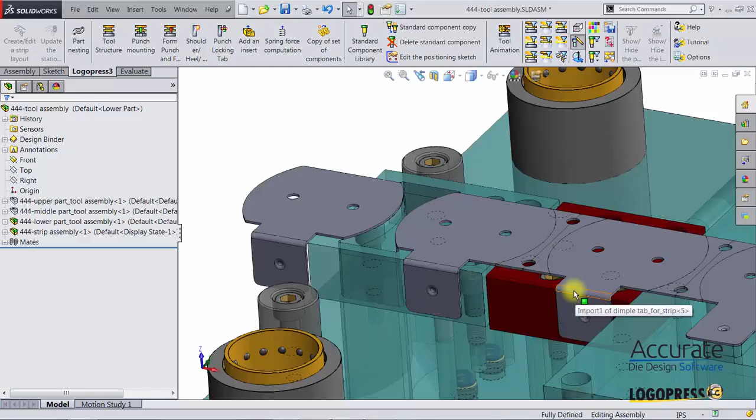We'll now make another change to the piece part. I'm going to add some flats to each side of the part. And this will also cause us to reduce the progression of the strip, otherwise we'd have too much scrap in between the stations. So first thing I'm going to do is open up the strip assembly.

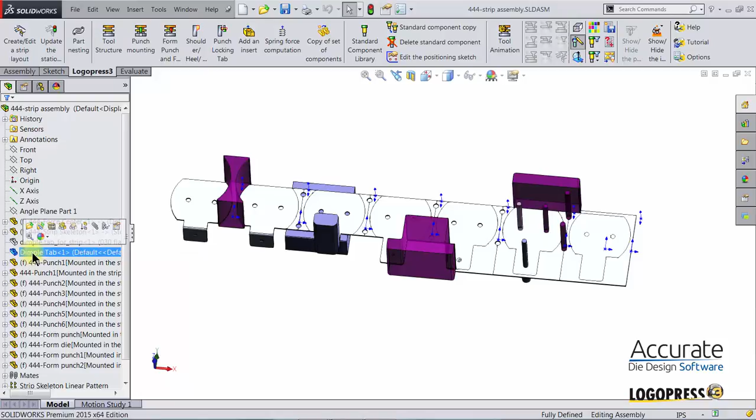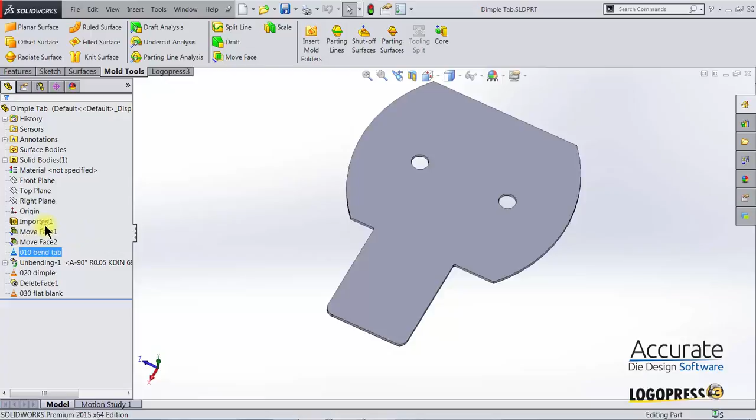And then, since this is a change to the part itself, we need to do that in the reference part. So I'll open up the part called Dimple tab. And the reference part is the one that has the station marks in it. So I'm going to roll up in the feature manager tree above that 010 station mark. And I'm just going to create those flats, I'm going to create a sketch on this top face and draw a rectangle.

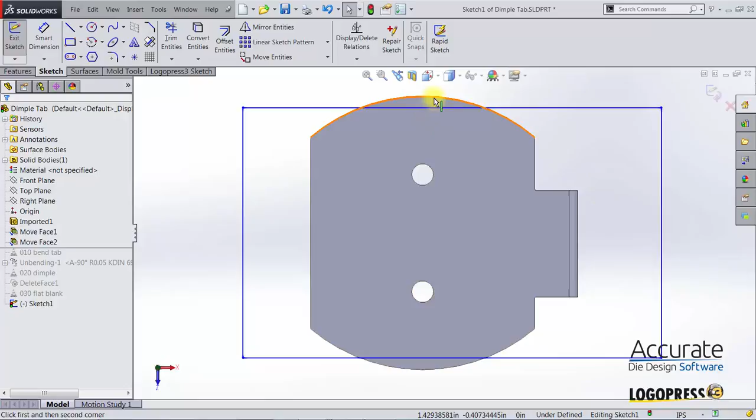I'm going to convert these two edges using the Logopress3 Convert for Construction. And then place two dimensions. I'm going to dimension from here to this edge. And I can make this dimension under Leaders. I want to make it a minimum dimension. So I have a dimension up here, and I want that to be 0.0625, 1/16 of an inch. I'm going to place the same dimension down here.

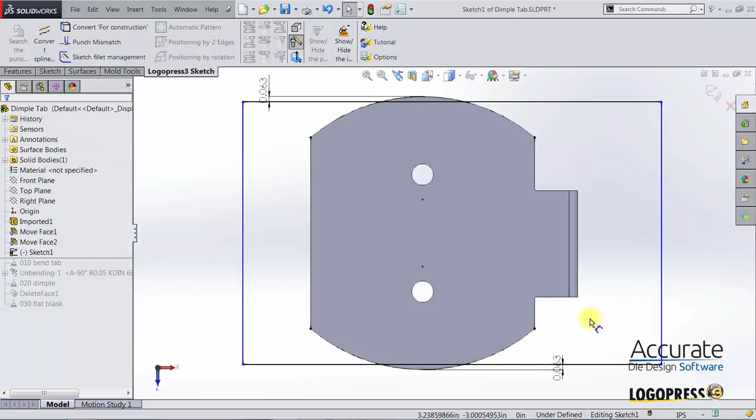Here's a little trick. If I hold down the Shift key before I make that selection, it automatically makes it a minimum dimension. And then I'll just place the dimension on the overall width here and make it 8 inches. And I'll also place the dimension here from the center of here to one of these edges, 4 inches, half of that. Just so we know we'll have it extending out past the part in each direction.

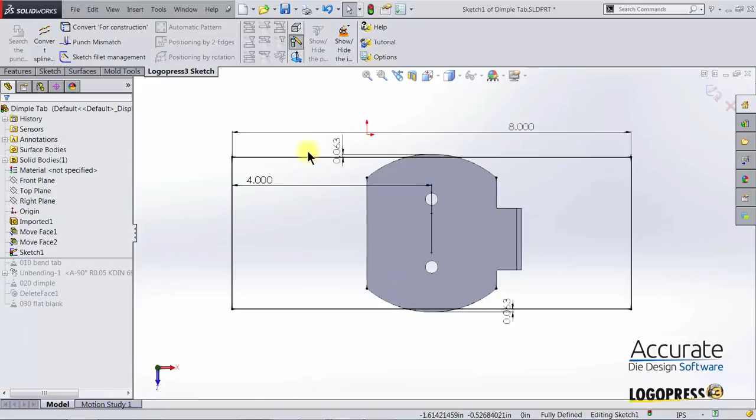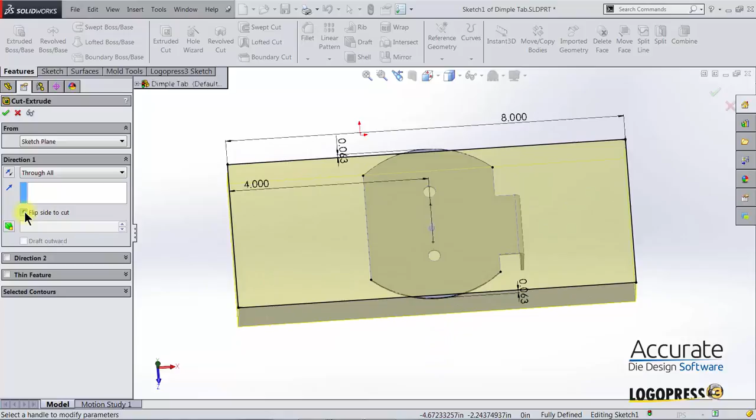Then I'll go over here to features and use a cut extrude, SOLIDWORKS cut extrude feature, to cut through all. And I want to flip the side that's going to get cut, using this option, flip side to cut. Now you can see there's a little arrow right here going to the outside. So instead of cutting the inside, it's going to cut the outside. And now we have two flats on the part. We're going to roll down to the end of the feature tree. You see our blank is also updated. And save.

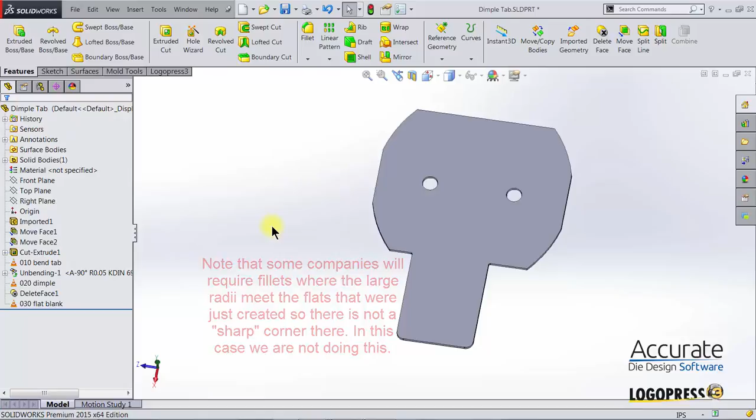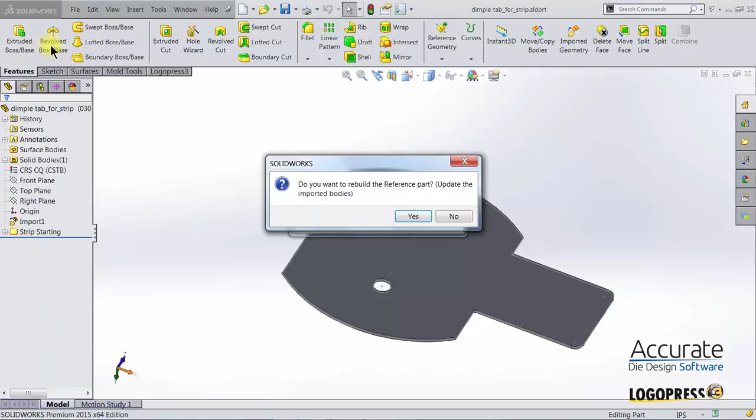I'll tab back over to the strip assembly. And you can see it has not updated yet into the part because, just like the last change that we had made, we have to select update the stations of the annex part using the strip. This will update the body files that the annex part is referencing. Do I want to rebuild the reference part? Yes. And now you can see the part has updated.

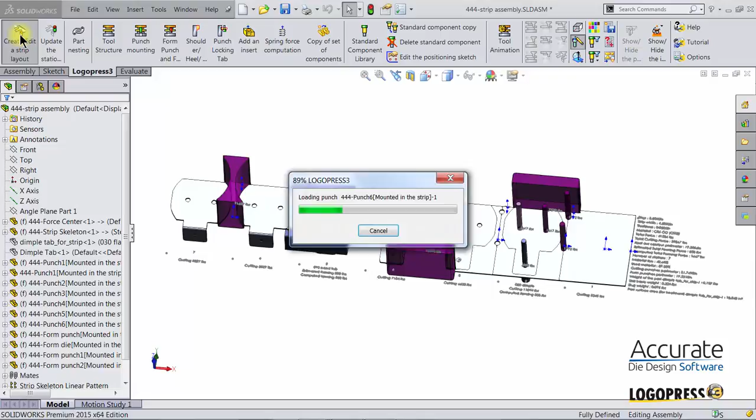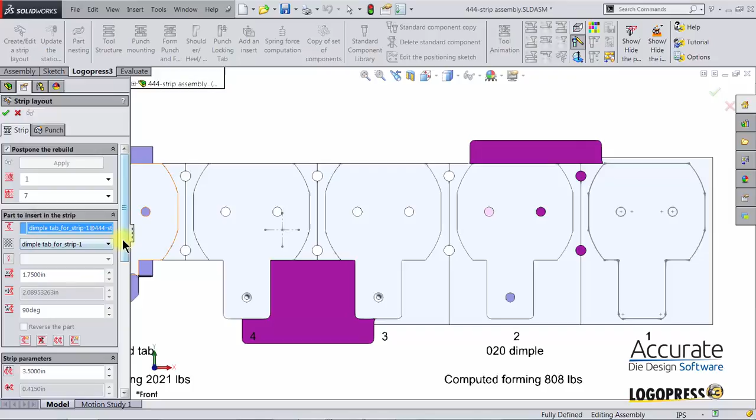So now I'm going to go into Create Edit Strip Layout. I need to update the sketch for this punch, this end cutoff punch. And also, I want to change my progression because there's too much scrap now in between the stations. So I'll do that first. I'm going to come down here. Actually, I'll change the sketch for the end cutoff first. I'll click on it, select Edit the sketch of the selected punch.

And I want to convert some additional geometry into the sketch of this punch. This is new geometry. That's why it did not update automatically. So we have to convert this in manually because since it's new, Logopress and SolidWorks don't know what to do with it. So I'm going to select Convert Entities, SolidWorks Sketch, Convert Entities, select, this is the blank sketch I'm selecting, those two vertical lines, and convert them off from the blank sketch into the sketch for this punch.

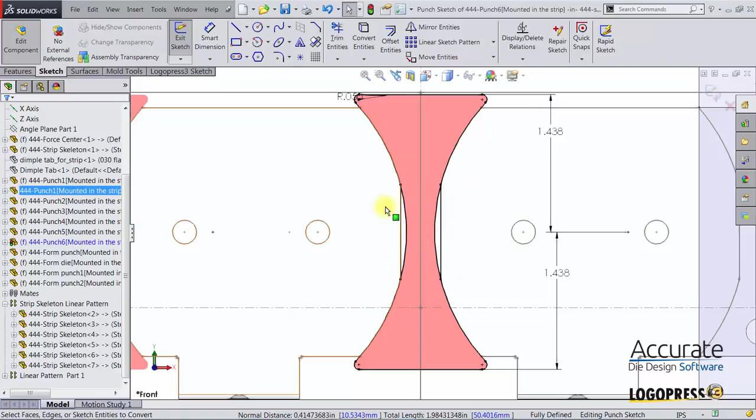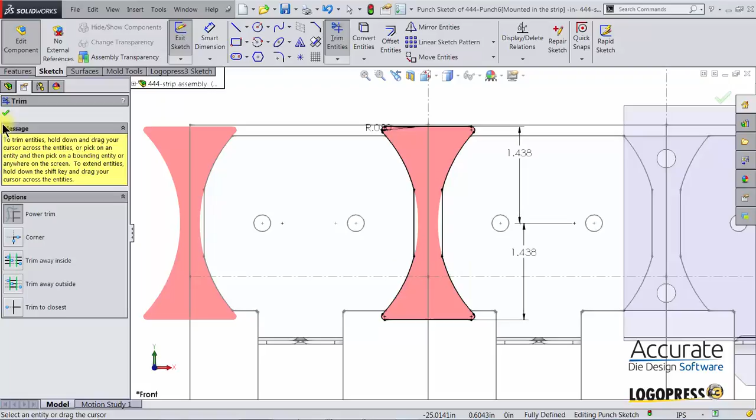Then I'll use the SolidWorks trim command to trim this area away. And this is the power trim function I'm using, where I can just cross over the area I want to trim. And now this punch is updated to the new geometry. And apply that change. And I'll save.

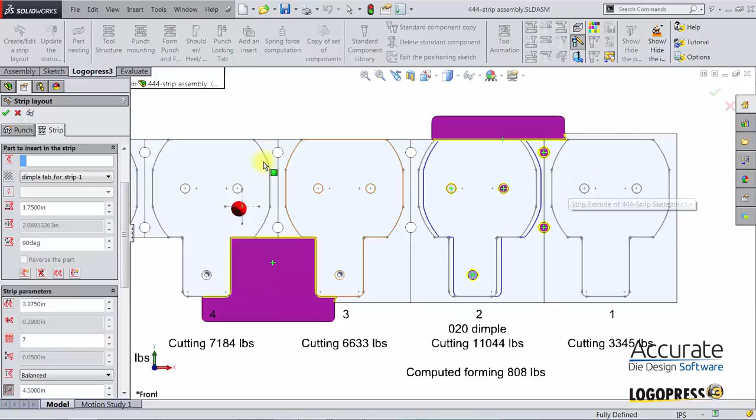I can now change the progression of the strip. So go to the tab called Strip, and down here I'll change the progression by 1/8 inch because I reduced the width of the part by 1/16 on each side, so that's an 1/8 inch. I'll update that right away by hitting apply.

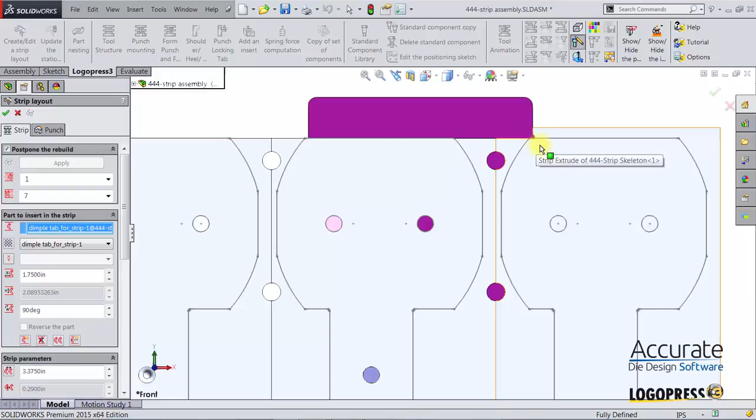And I'm also going to move the part, I'm going to recenter the part this way, because you see this cutoff punch, the length of it did update with that progression change, but the position is now going into the part itself. We want that to remain in the scrap area with this mismatch. So I'm going to change the part position by an 1/8 inch, reduce that. So it's just sliding it over the X part position an 1/8 inch.

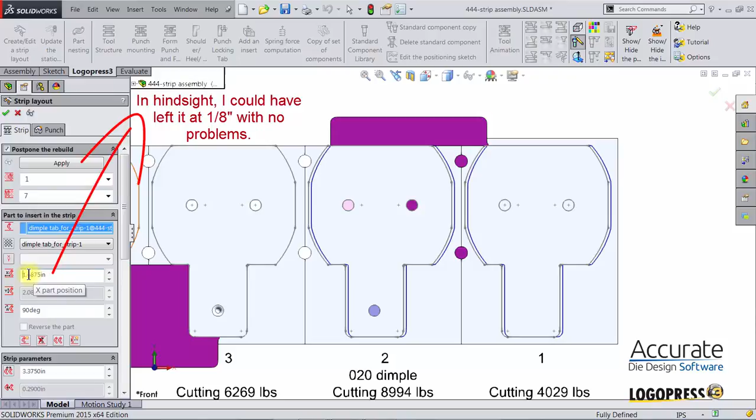Actually, I'm going to reduce that by only a 1/16, so I'll just minus 0.0625, and you can see now it is 1.6875, and I'll hit apply. And I did it that way because now the pilot holes are still centered in between the two stations.

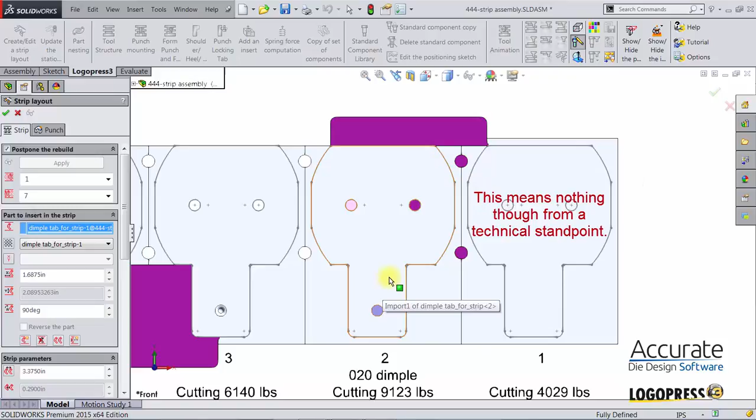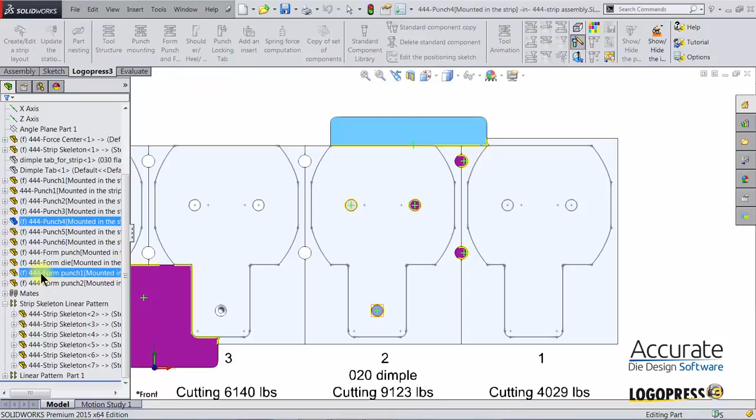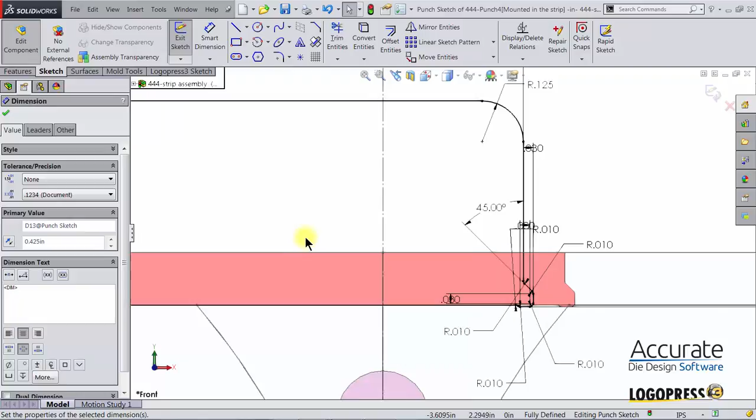This punch now, it is too close to the part itself. I want this edge to be still in the scrap. So I'm going to click on it, select edit the sketch of the selected punch, and I'm just going to reduce these two values by an 1/8 inch. And you can see it is now in the correct position.

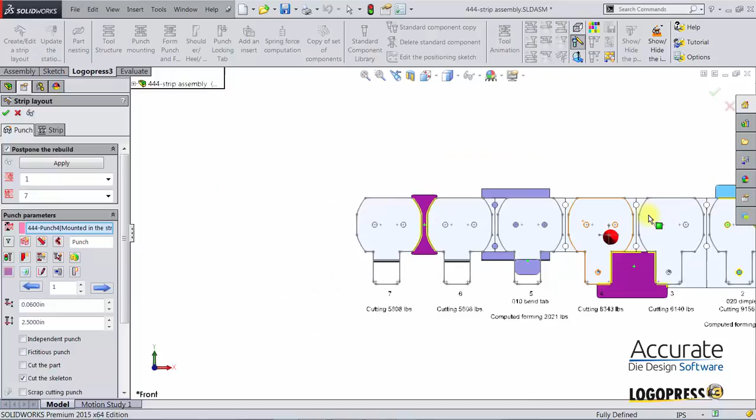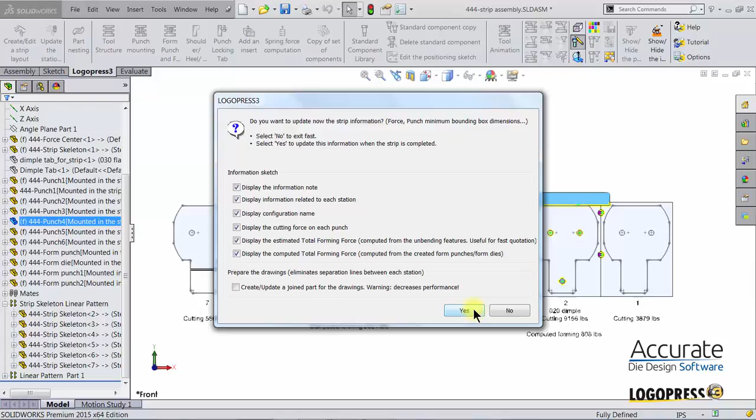Everything updated nicely, even our cutoff punch. You can see, but I have to apply the change of this cut. And I'll click OK, and I will update the information note. And save that change. I will now tab back over to the tool assembly.

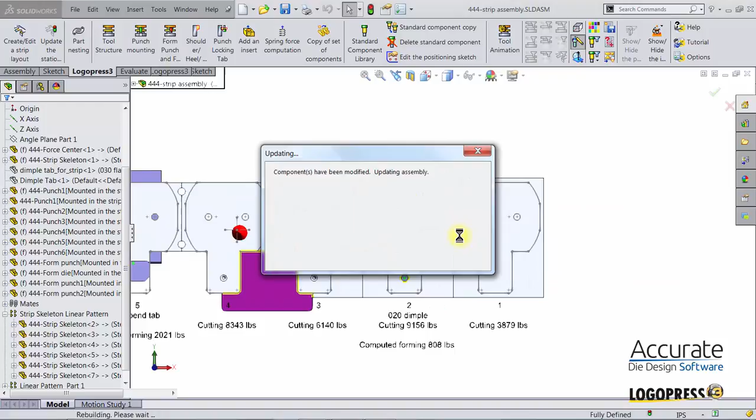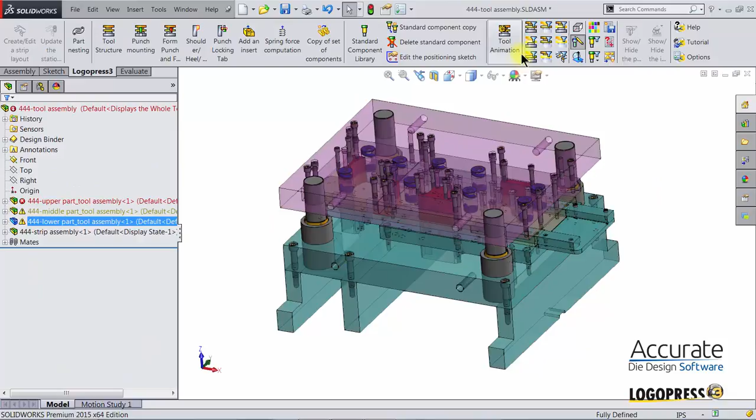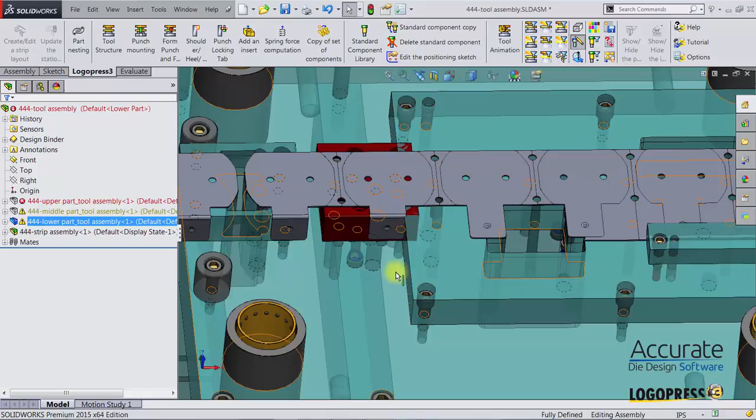There are some errors here, but we did change the progression. So let's see what happened there. First, you can see that the form punch, which is defined off of this part, did not move. But now that the progression has been reduced by 1/8 inch, the end of this die block is going too far. And if I measure this, you can see the normal distance is 1/2 inch. So I'm going to reduce the length of this by that 1/2 inch plus an 1/8 inch gap.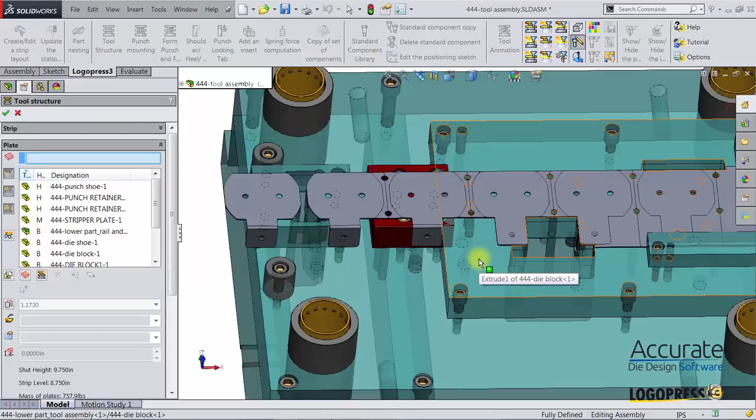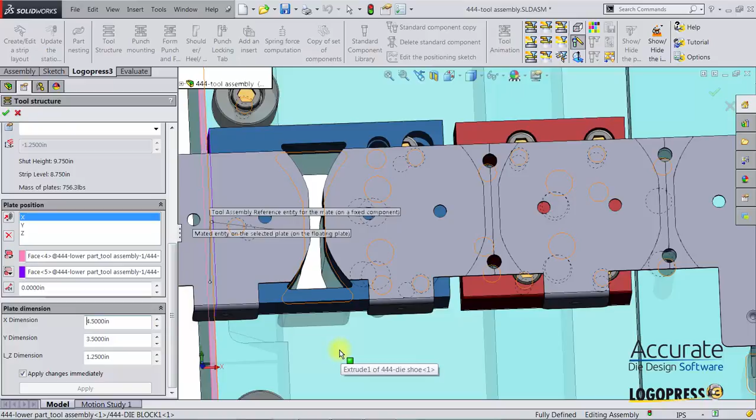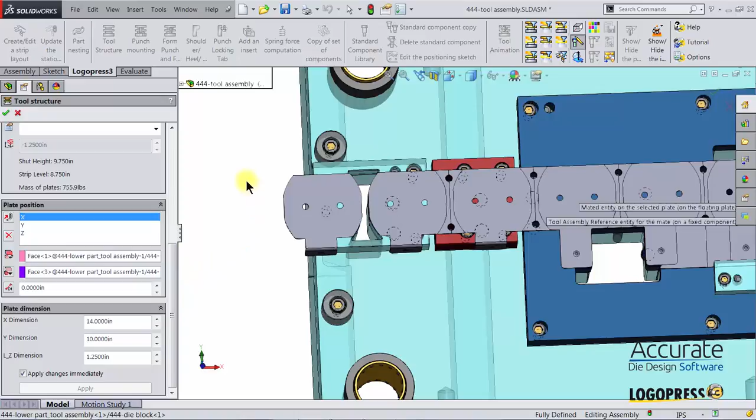And I'm also going to reselect this die block, and I notice that this is 14 1/8. Let's make that an even 14 inches. There we go. And exit tool structure. If you ever do see this where the screws do not look like they're in line with the holes, that is most likely a rebuild issue. If I just put focus in the graphics area and do a Control Q rebuild, you can see that the positions are now correct.

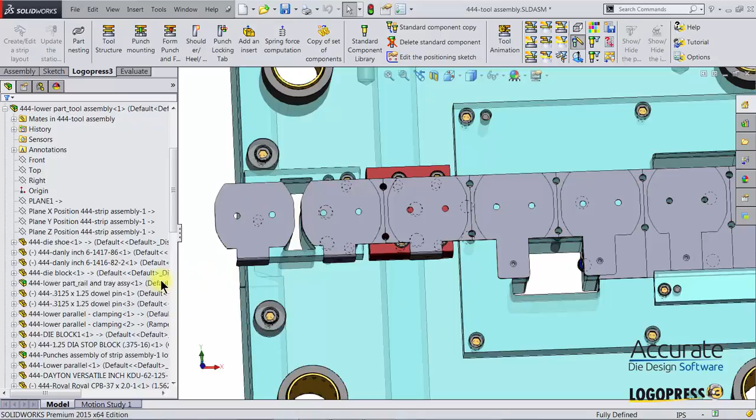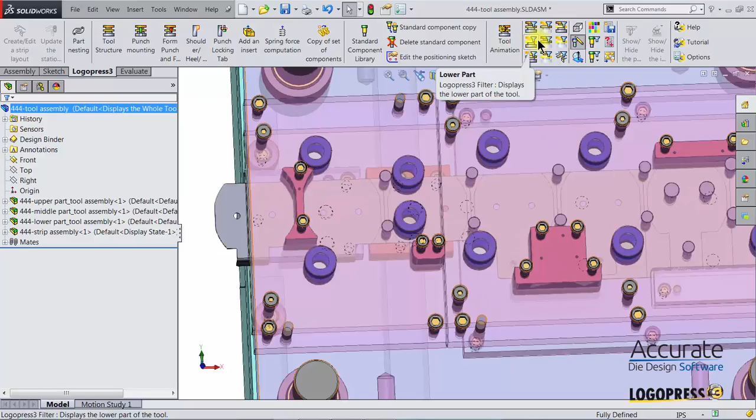And you can see, show the rest of this, you can see that the errors have been just corrected. Those errors were caused by items being forced off of the blocks that they once were on because of that progression change. So we just had to make a few minor adjustments to the length of blocks, make one shorter, make this one shorter, make this one a little bit longer, and I do see a couple of other things. You can see the position of the lifter pins need to be updated.

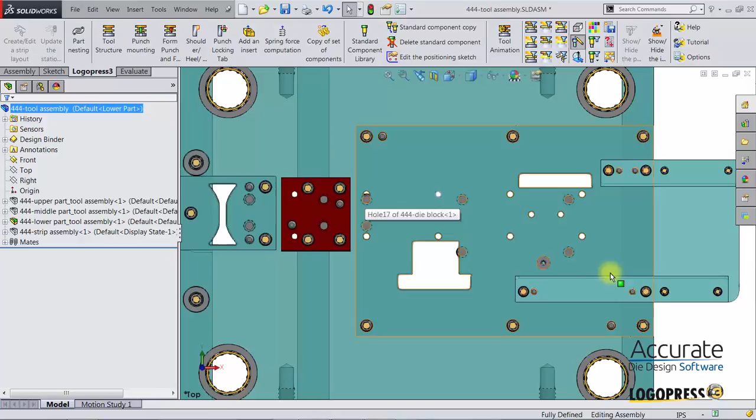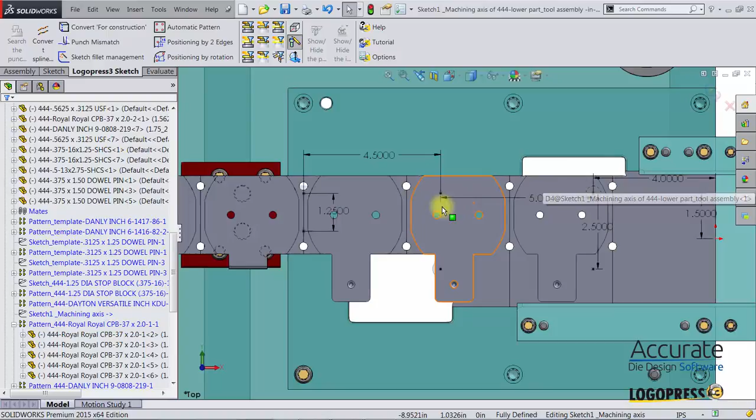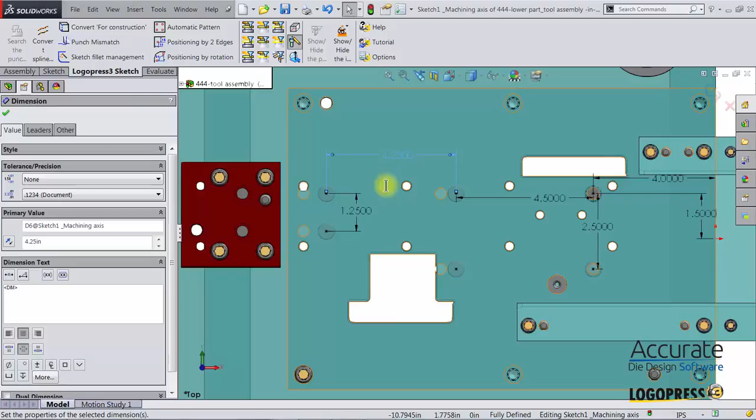So I'm just going to click on one of them and select Edit Positioning Sketch. And I'm going to show the strip layout. And I'm going to reduce these dimensions. I'll reduce this one by, see what a 1/2 inch looks like. That looks good. And this one right here, I'll reduce that one by a little bit more also. Say a 1/4 inch. Show the strip again just to make sure it's going to look good.

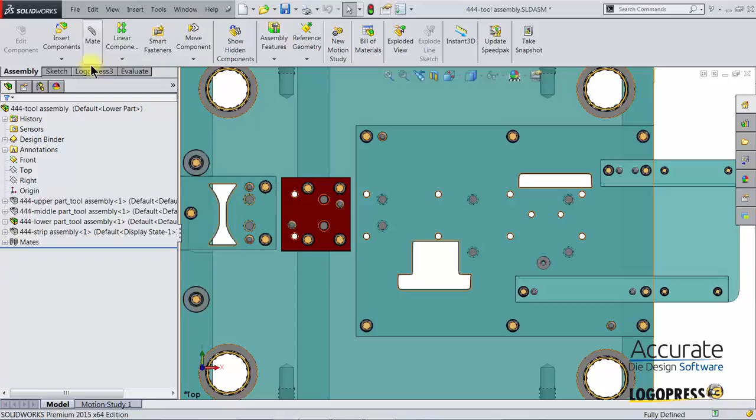Exit the sketch, and the position's updated. I'll double check that, show the strip again and make sure that the stripper plate, yep, that all updated there, along with the position of the pilot holes. And I'll also look at the upper, yep, all my pilots positions have updated, and the position of my punches, everything looks good.

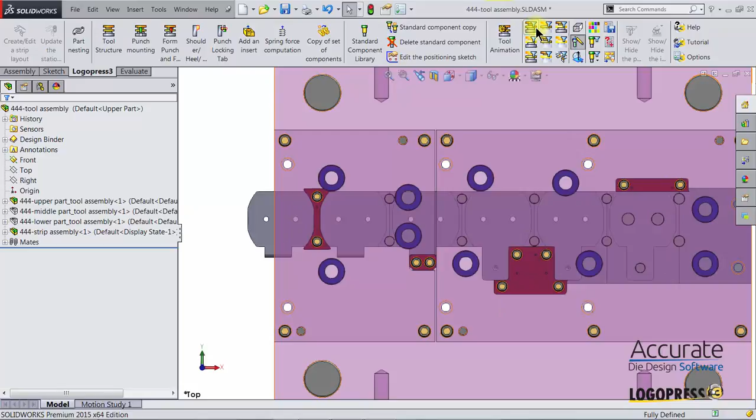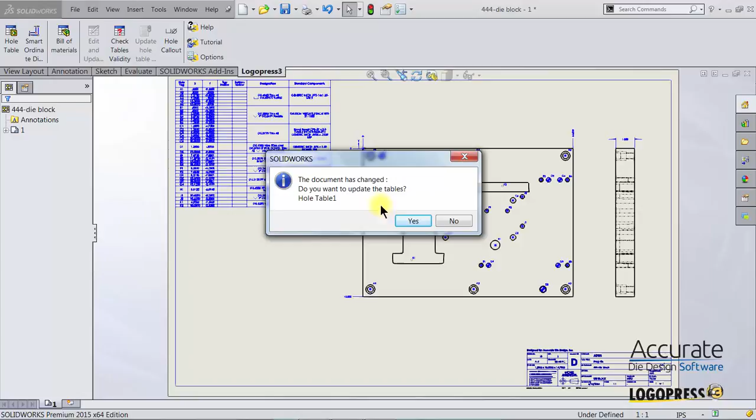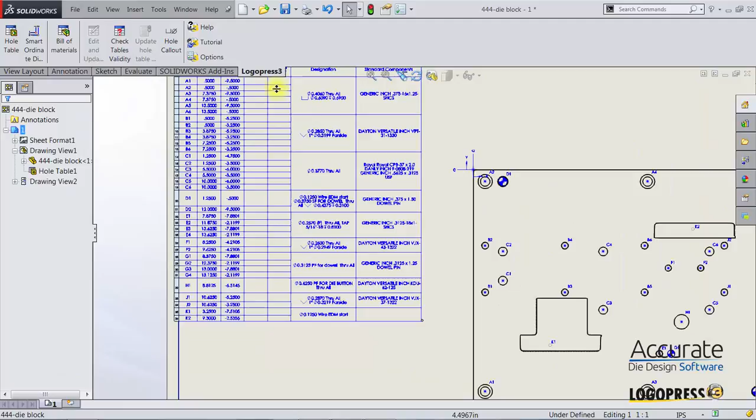I'll save this. And then if I go into, say, the drawing for that die block, you can see it's telling me that something has changed in this die block. Do you want to update the table? Yes. And now the geometry is already updated to the new locations from the progression change. But now the hole table is already updated. That's the power of parametrics. I'll save this.

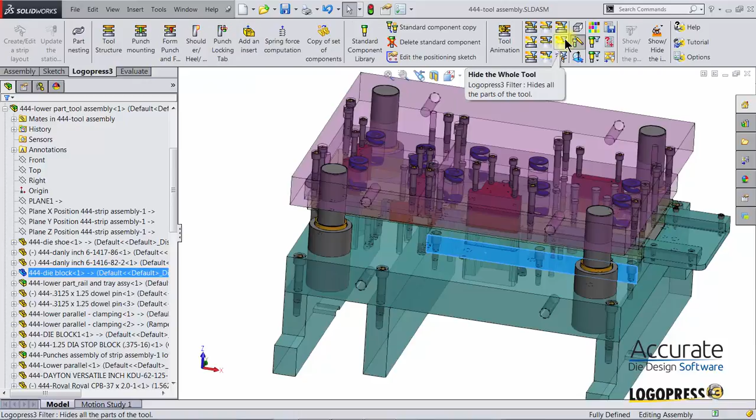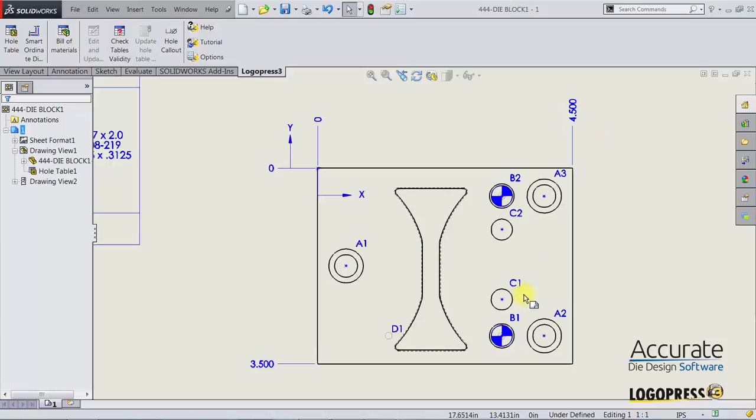And of course, we would want to do that to each and every block that we know had changed. Open up the drawing for that. And cutoff block, yes. Update the table. Because now you can see that was 4 inches long. Now it's 4.5. Show the middle. Yes, update the table.

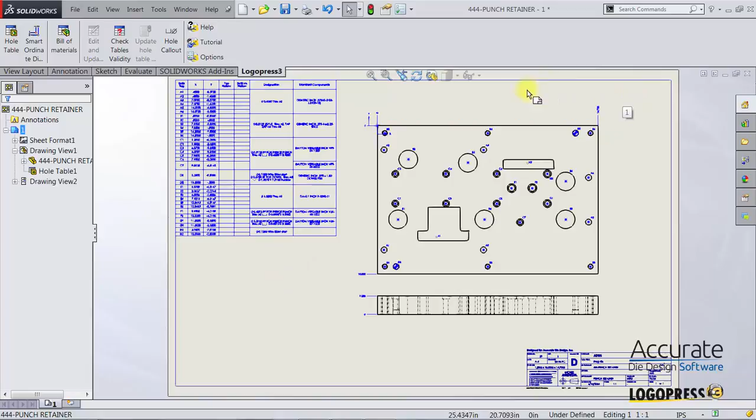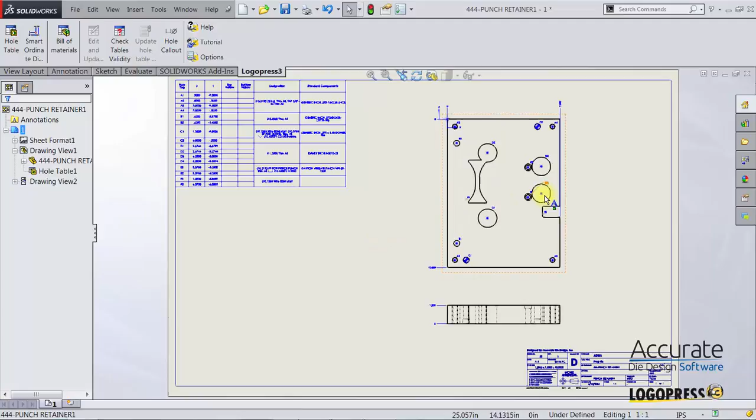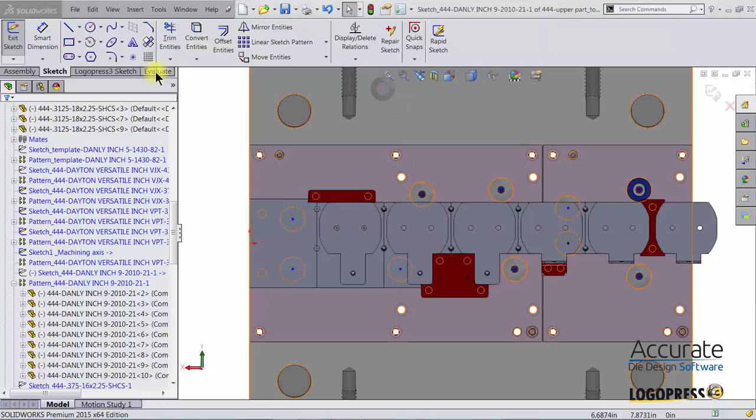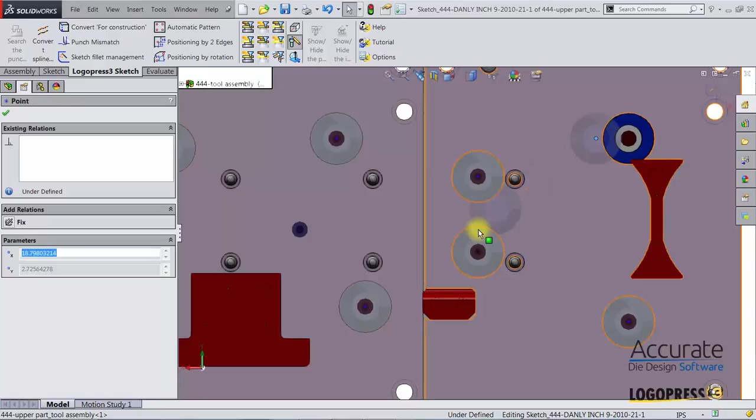I notice now some of the springs are not in the right location. So I'm going to go back to the tool assembly. I'll click on one of these springs. Select Edit Positioning Sketch. Puts me into the sketch for that. And here we can see how they're breaking in. So I'll just slide that one over just a little bit. If I had a dimension, I would change that. Check to see if any other ones are breaking into anything. No, they're fine. Exit out of sketch. That'll update.

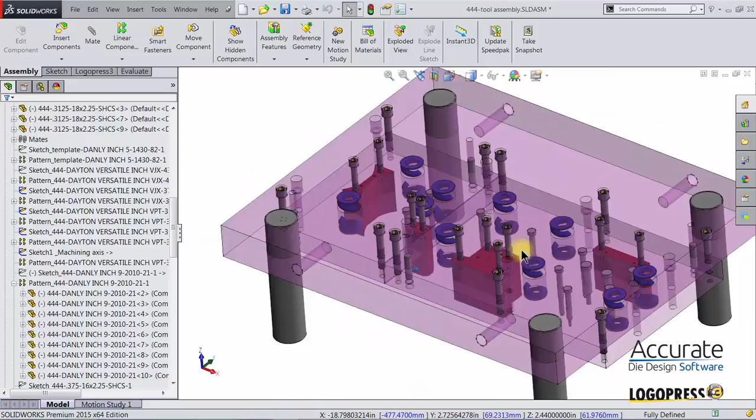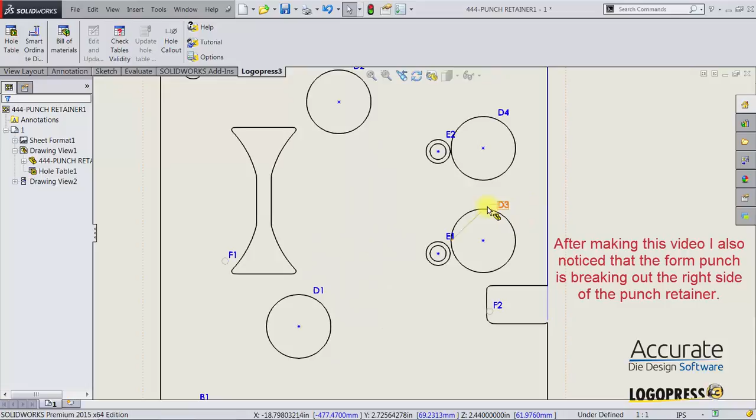Tab back over to the drawing. Yes, I want to update the whole table. Now you can see that's in the new position. If we feel that this is too close, we could move those also. Open up the drawing for the two shoes. Update that whole table for each one of these. This has all the new positions for springs and everything that moved.

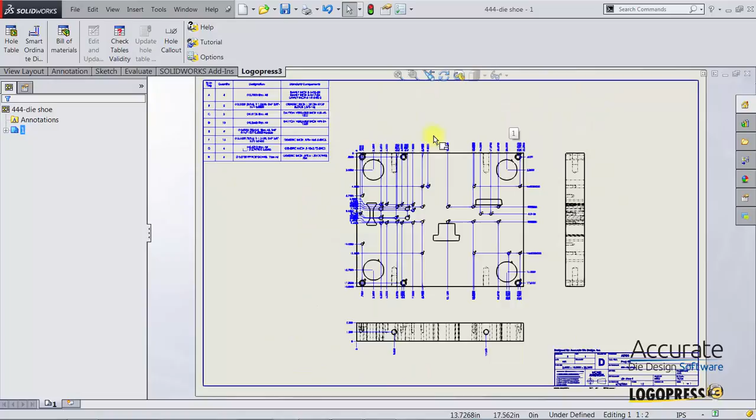You see everything moved and all the dimensions have changed with that. And now that change is completed, including the detailed drawings.